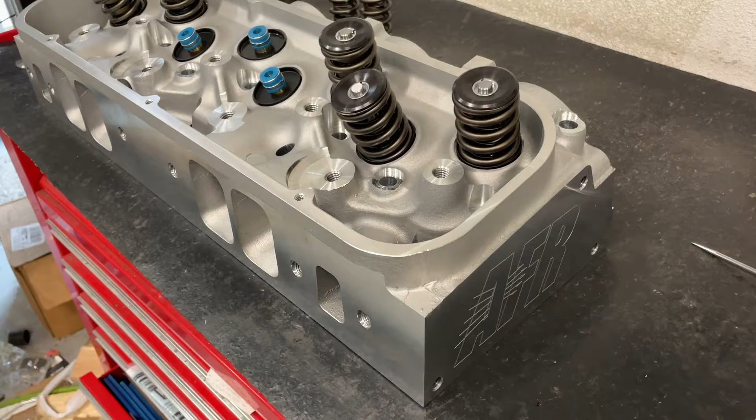Hey guys, this is Eric Weingartner with Weingartner Racing. I'm going to be doing a video today over these big block Chevy AFR Enforcer heads.

Now, you may have seen these. These are not like the normal AFR heads. Most AFR heads are at least part or CNC ported, like the chambers. These are your Enforcer line, which they call an offshore head, meaning they're not cast in America or even machined here. Yes, that means AFR did not do the valve job. If you ever want to notice how to tell from the outside, look at this logo on the AFR, it's different. There are some slight differences as far as this pad here that it sits on compared to the other ones. So just look at this and you'll know.

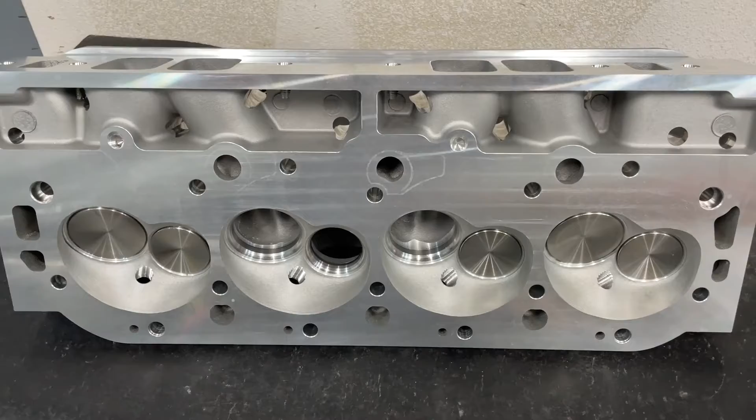Now, as I go through this head, I'll try to give you as much information as possible, and I am going to give you an honest, real review. So this is what it looks like from each view, so I hope you get an idea. There's your intake, and I'll get to all this in just a minute. This is what the chambers look like. And sorry, it's just me, so I don't want to get people confused. And this is what the exhaust looks like. Okay, all right.

So, okay, once you spot this exhaust pattern, it gives away to me exactly what head this is. And it kind of frustrates me. I'll explain — I just don't understand why AFR picked this one. When I saw this pattern here, there's only a few heads that have this exhaust that looks like this, and I'll go through them. There's a Pro Comp head that looks like this. There's also the Pro Header head — Pro Comp's Chinese, Pro Header is also Chinese, but now that head's been done by others, AFR now.

And also the RHS. When I initially saw it, I was like, oh, please don't — I bet it's a Pro Header head, and I really do think it's an imitation of the Pro Header head, or it's the exact Pro Header head. But I'll go through each detail as much as I can.

RHS had one initially like this, and I think what happened — and I'm giving you too much information here, but just bear with me — the RHS had the pattern like this, and I think Pro Comp, which is now Speedmaster, allegedly took that head and copied it, so they had something that looked like this. Then flash forward a few years, and another head — allegedly Pro Header or whoever made that for them — decided to redesign a few things, and they came out with their head, which is slightly different than the Pro Comp head. And I believe this head, allegedly, is the Pro Header casting.

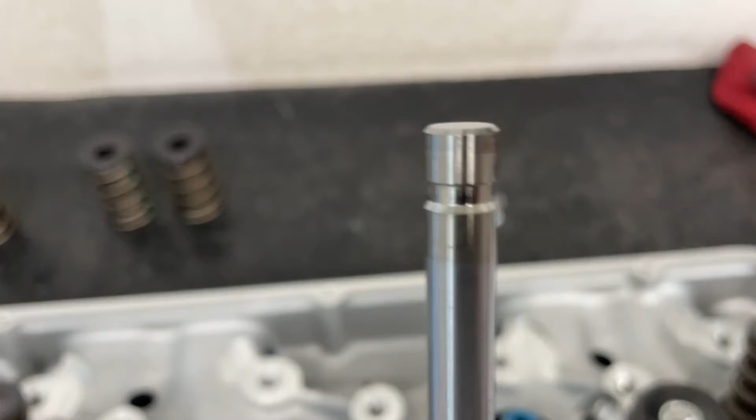This is a Pro Header head, and I'll tell you some of the stuff. I took it apart, and this is the valve that comes in it. I don't know if my camera's going to capture it, not very well, anyway, looks like.

But I'll go ahead and tell you, this is an AFR valve. I think they get their valves from Argentina. Don't feel bad about that, that's actually good quality stuff, a lot of good people do. But this is a nice valve, nice intake valve. This is the same one you would get in their 305 heads. Good valve.

This is their exhaust valve, also quality valve, good valve. These are the springs that came on it, and they're very good too. No problems there. There's your locks, everything's good.

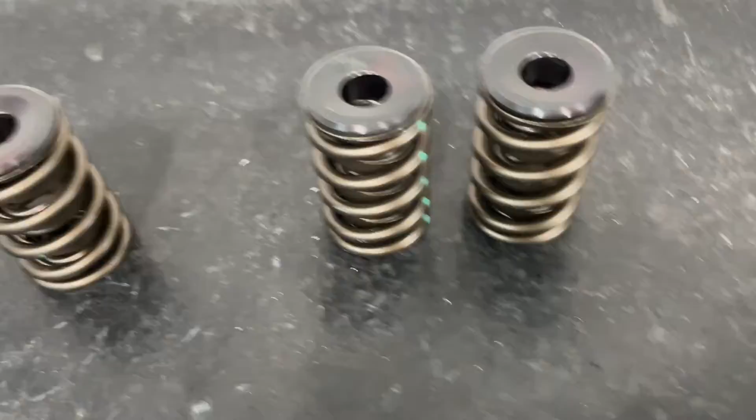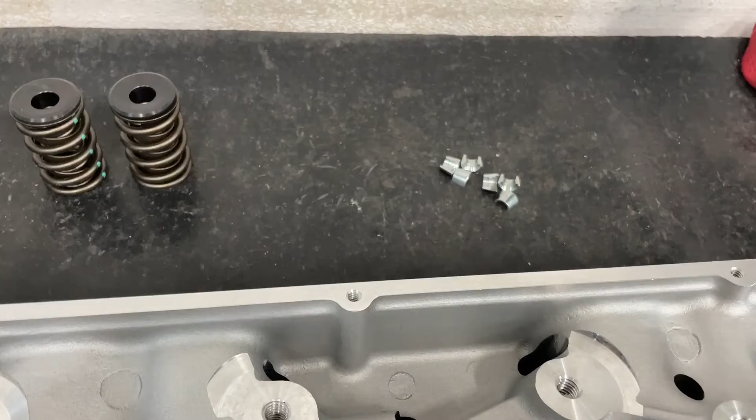The only thing I have a beef with is these are the seals that came with it. I know at one time AFR used these seals, but they haven't since. They now use, at least on all their small block side, and I thought all the big block side, seals that look like this. These are the better seals, and these aren't my favorite.

They're by far not my worst, but I don't like these because you see these rings, this ring and that top one, several times will come off and go into the oil. Usually it's because people didn't set them up right and have too much lift, and it hits this and knocks it off, or they weren't put on right. They seal up pretty good, they're just not the best.

These are the quality ones you need, and usually AFR puts these on them. So that's the only thing I could say as far as the hard parts they use that is different from their AFR 305, 315 — they're good stuff as far as parts go. So if you're asking about parts, the parts are pretty good.

But let me flip over and I'll show you the chamber side. Okay, now this is the chamber side, and I'll get to the worst in a minute.

Now, if you were trying to see how can you tell if a head's a Pro Comp versus a Pro Header, I've been doing heads so long now it's easy to tell. This is not a Pro Comp or a Pro Comp casting, or one that's like a Pro Comp casting, because a Pro Comp casting actually looks like they took an RHS chamber and then modified some stuff.

So I know this isn't a Pro Comp casting, because the Pro Comp would come off larger here, the spark plug would actually be about here, and the chamber shape on this side wouldn't be like that, it'd be more curved up. It's hard to describe, but it's different.

So this is like what I said — when Pro Header, allegedly, made it, they took the intake port from the Pro Comp. So this part and this part came from a Pro Comp. The exhaust part came from the Pro Comp, and they put a different chamber on it. Because really, that's the only thing that separates the Pro Header from the Pro Comp, allegedly — the intake port and the exhaust port from Pro Comp, chamber from Pro Header.

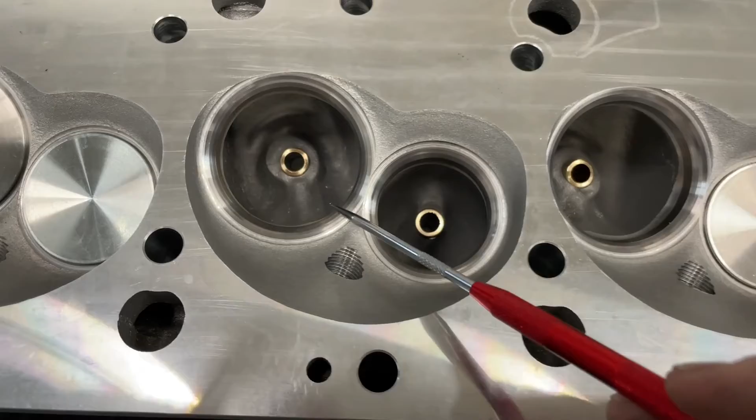Look at that guide, this is Pro Comp. And Pro Header did the same thing. So they redid the chamber and left this crap. Look at that, see all that bulge there? What vane? It's just a blob.

Let me look at this one. Same thing, blob. I'm gonna get a flashlight, so hold on. Okay, I got the flashlight set up. So you see this whole area around the guide? Look how crappy that is, right?

That screams Pro Comp. And the next giveaway is this — you see this lump here? I know you see it, it's huge, it's in each one. This one will have flaws, but you can kind of see it, it's right there. I'm gonna go ahead and warn you, because somebody's gonna start grinding — guaranteed they're gonna start grinding. You can shape this guide and narrow it down and make it better, but you cannot take out this lump.

I know someone's like, no, you can make that straight, because no other head besides Pro Comp has that. RHS doesn't - and I'm not implying RHS was a Chinese head, they just got copied, but they copied it bad and left this lump here. That lump you cannot grind out, because behind it is the spring pocket. If I ground that smooth, you'd put a hole right where the valve spring sits. Horrible, horrible, horrible.

So you can shape this down and make it flow probably a little bit better, but you cannot grind this down. You'll have a hole right here in this region. This goes all the way up to where the spring is, and you'll be sucking oil in.

So there's that dead indication that this is a Pro Header head, because Pro Header copied the Pro Comp intake port and exhaust port. That's what those are, guaranteed. This chamber is the only thing that Pro Header and other companies like it changed from the Pro Comp, because the Pro Comp chamber is different.

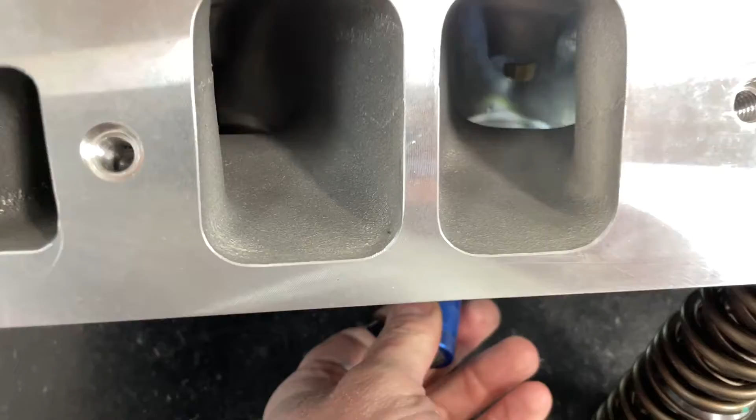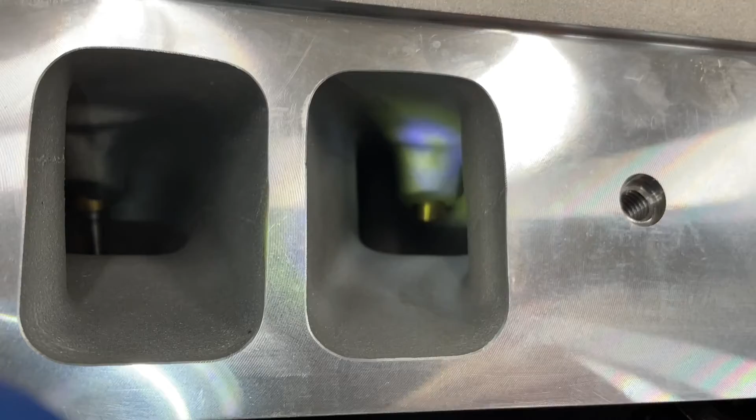Okay, so far, hope you're seeing it, everything good. Now let me flip it over to the other side so you see the intake port side, because I'm going to talk about one other thing that I don't like. Here's the intake port side, so you can kind of see what I'm talking about. As far as the smoothness of the casting, it's actually pretty smooth - all Chinese heads, for whatever reason, are pretty smooth castings. And then you can see the lump better from this angle. There you go, all right, so you got that view.

Now, one of the things I really am not a fan of with this casting - let me move some stuff so you can see better - is, like I said, this intake port and exhaust port and our Pro Comp stuff, it's the same casting, that part. Well, one of the big problems that the Pro Comp casting had was right here, this part right here. You're like, what are you talking about?

The distance, the measurement, so the thickness of material - let me get my pointer. The thickness of material right here is only 236 thousandths. That's it. I used my sonic checker to test it.

Pro Comps were notorious because you put some springs on it, some really good springs, you add some RPM, and what it would do is this aluminum around here is holding that rocker stud. But you start adding some RPM and spring, and there's only 236 thousandths holding this down. They'll start cracking here, and I cannot begin to tell you the number that not only cracked here, they ripped this whole section right here out. Because other heads, what happens is they'll move this rocker stud up, giving it more area around it, which also means you have to move that one up, and it makes it stronger, okay? But that's not what happens here.

So anyway, that I don't like. But in AFR's defense, because I'm sure if I was AFR, this is what I would say - they still have, I think, a lifetime warranty on this casting, so if you were to bust that out, they'll still replace it. So overall, as far as that goes, the head itself's not that bad. It's just I don't understand why AFR, a huge company, you could have picked any head. You could have gone offshore and had them make it for you and put your name on it. Why didn't you pick the one that's copying your stuff already instead of picking this one?

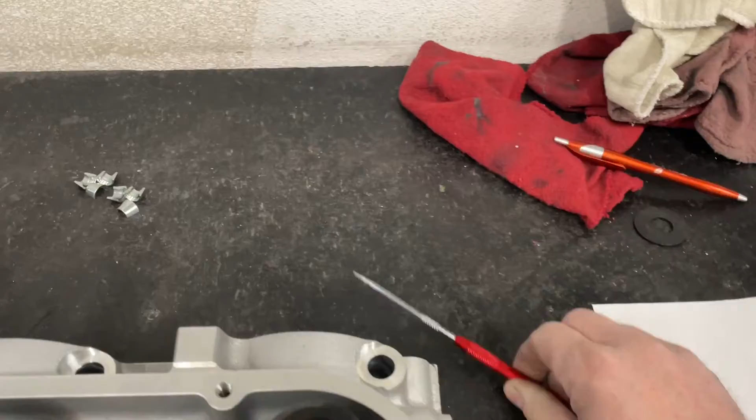This is the flow numbers. I'm gonna explain. This was flowed on a 4.310 bore.

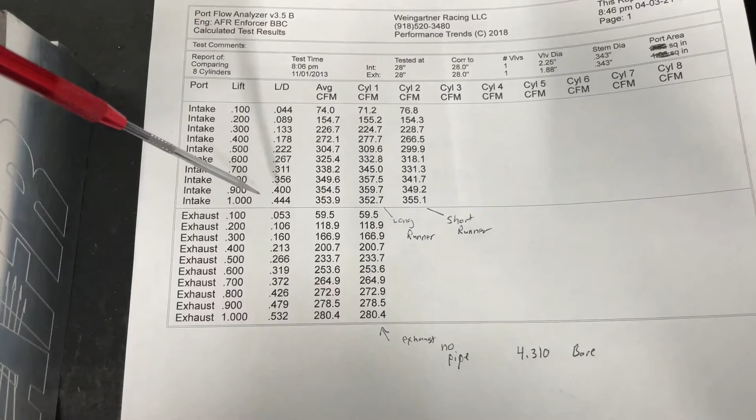You have, this is the long runner, because the way the big blocks work, you've got this runner as a long runner. This one actually will always flow better. This one is a short runner. Unlike your Fords and Chevys, small block Chevys anyway, the runners aren't all the same or just mirrored. These are definitely different. This is different than this. They don't flow the same.

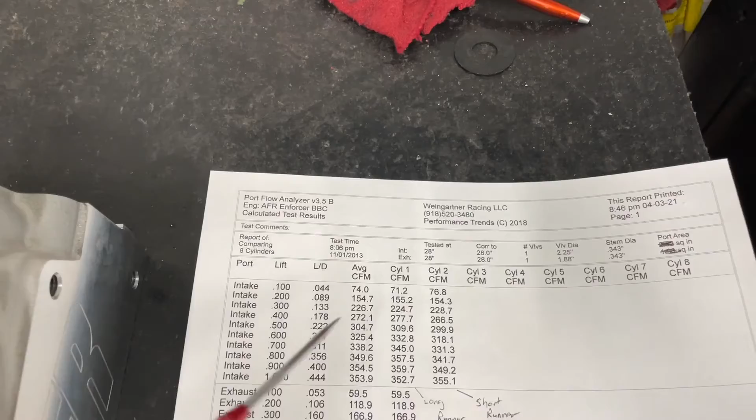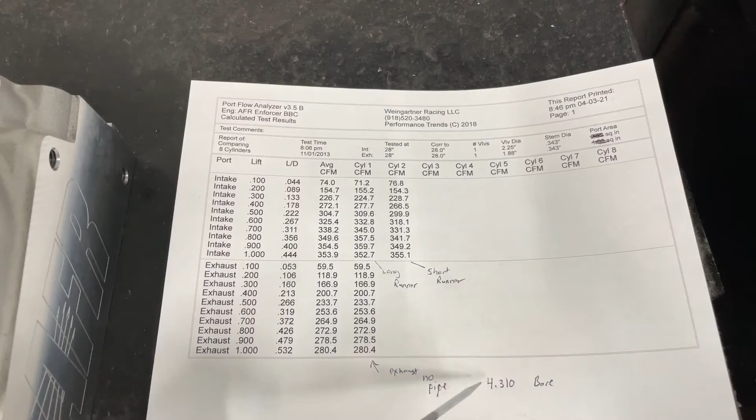Because of that, most companies don't ever publish that one, the short runner. I do, so I'm gonna go ahead and tell you. This is the long runner, this is the short runner, that's the intake flow. I flowed it on a 4.310 bore, this is the exhaust flow. Without a pipe, I don't use a pipe. I know when AFR flows, they like to use a pipe. I just don't. So if we look at the numbers, honestly, they're pretty good.

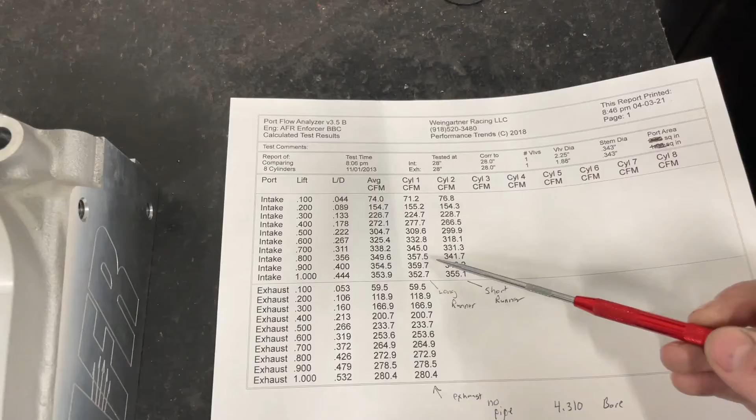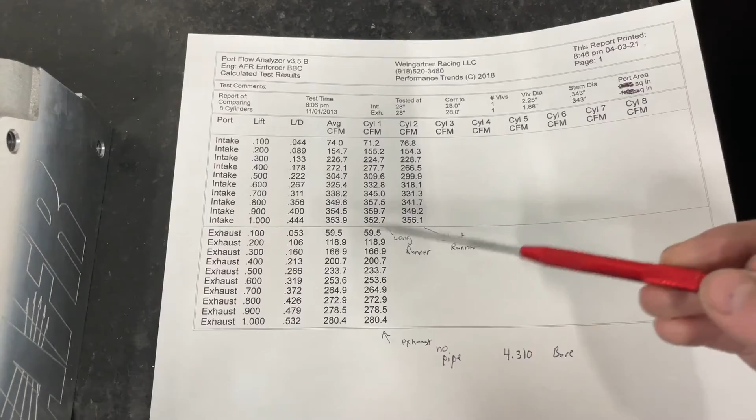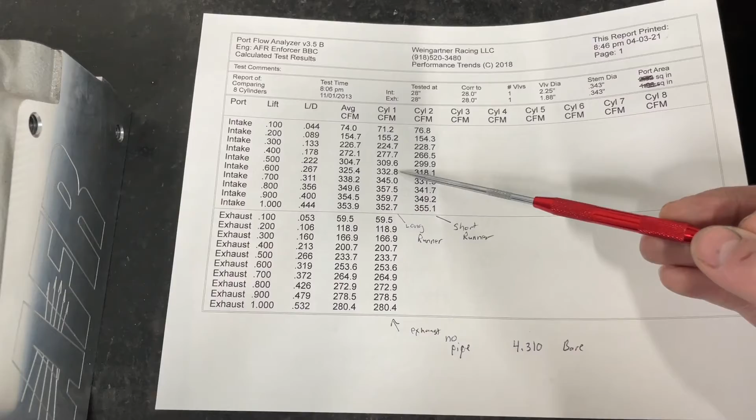But this is a 320cc head, they claim. I didn't CC it, I'm not gonna. The numbers, even with all that bulge and everything else, really aren't that bad. I think the reason why these numbers down here especially, remember, I really look at the 4, the 6, and then at the 1. That's what I look at. The 400 number for a 4.310 bore is really, really, really good, both of them, which honestly kind of shocked me. And I think the biggest reason for it is this.

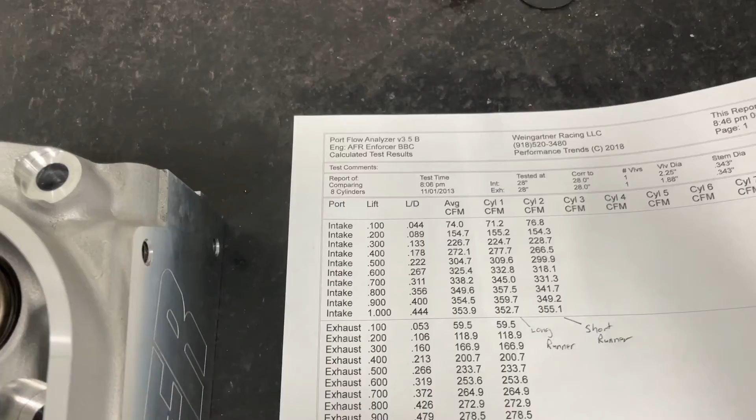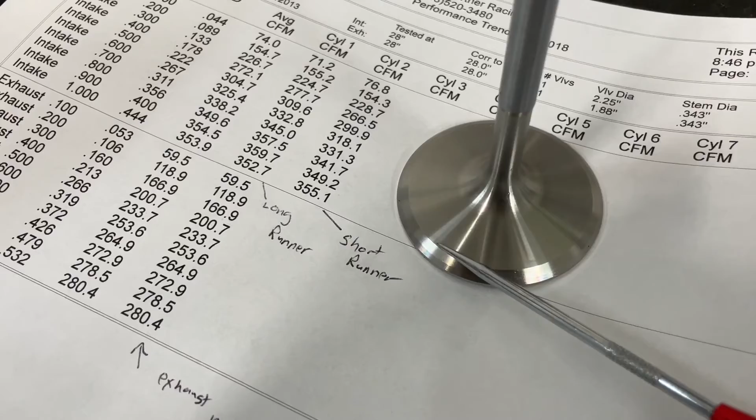This is their valve, the AFR valve, but it's got a big back cut right here, which I can't capture on video very good. That helps out low lift flow a lot. So I think that's the reason why the numbers down here are so good.

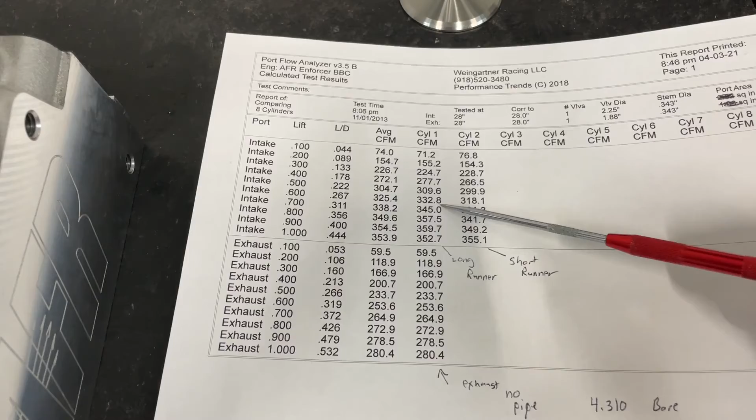But if you notice, really from 5 and up, 5's not really that impressive to me. I expected more. But that 600 number is okay, really not good by the way on the short runner. But then at 700, it's really pretty good, that's pretty good for the size.

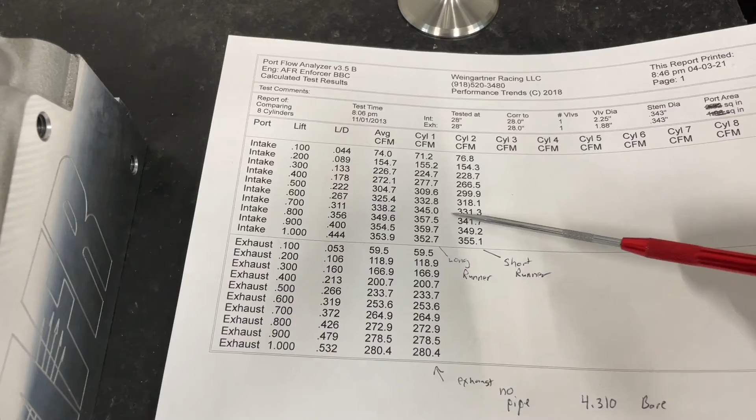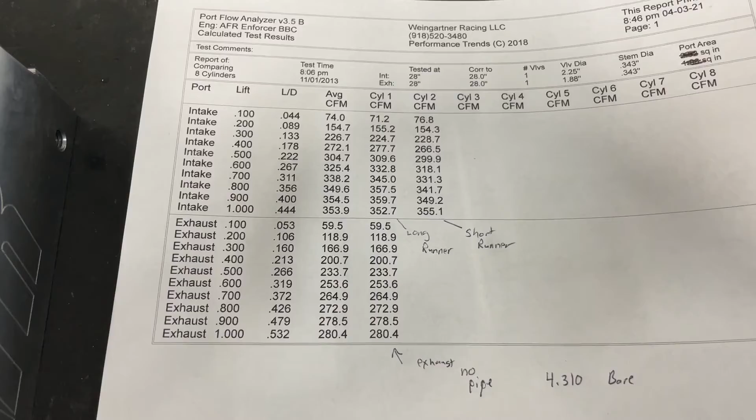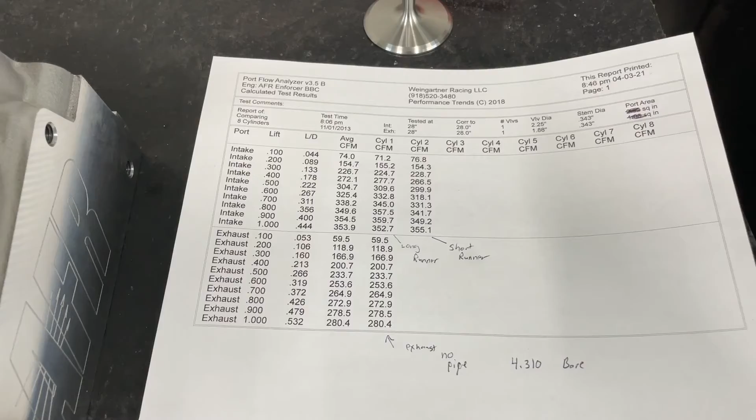It's not bad. So overall, if you just look at the flow numbers and I just give you this, I'm like, well, it's not a bad head. Especially on the exhaust side, it looks pretty good too. As far as flow-wise goes, it's not a bad head. If I never showed you the other stuff, there's probably room in it. I don't know how far you could port this, because I've just got some things I just don't like about that spring deal there.

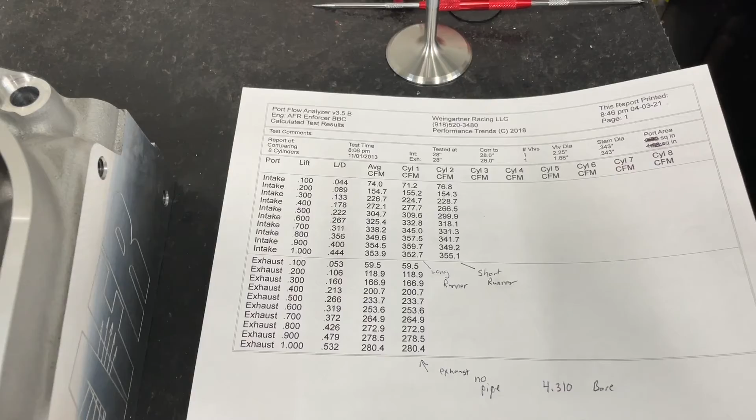And I know AFR's got a warranty on it, so you shouldn't be worried, but once you go grinding, you void it. But anyway, hopefully that gives you some information about this head, as much as I can give you.